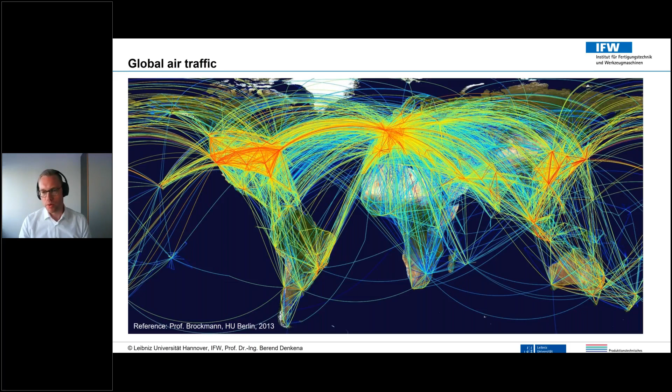But let me first start with a short introduction. I want to talk here about the global air traffic. This is a picture about the global air traffic in the year 2013. Beside these flights shown here, we have the topic of manufacturing of aircrafts. When we look at that topic, we have two things: first, the manufacturing, and secondly, the maintenance, which have to be economically and sustainable in the long term. So the topic is manufacturing and maintenance of aircraft components.

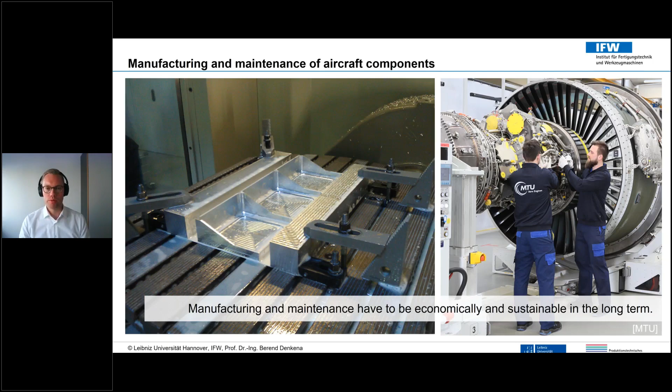So, manufacturing process chains in the aircraft industry. I have shown here 2 process chains which are important for our investigations at our institute. In the picture at the top, you can see the process chain of the production of cutting tools, typically out of cemented carbide.

We are starting here with the tool grinding process. You can see on the left side a reference workpiece with helical flutes in it. After the tool grinding process, we have a quality assurance. Then the tool is used in a milling process, for example, or also in a drilling process. You can see here this arrow, which is now going from using the tool from the top to the bottom into the second process chain.

And there we have the process chain of milling aircraft components, or also of repairing aircraft components. When we go ahead, you can see the quality assurance after that. And when the tool was used, we can also recycle this tool and bring it back into our manufacturing to use the tool. So this is the process chains on which we have a look today.

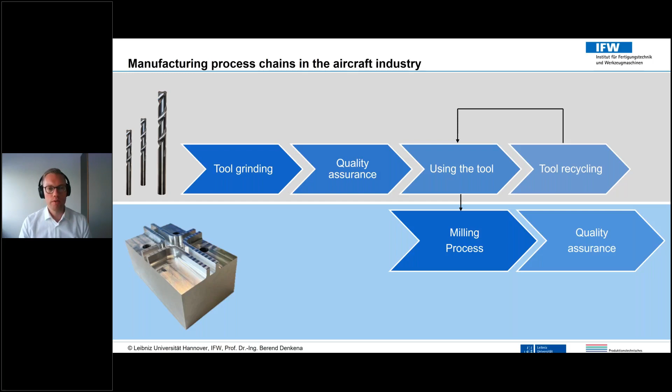And now I will come to my approach first, and I want to show you how AI models can be used in a self-learning process adaptation in these process chains.

So first, I want to start with a vision of an autonomous production system. In a typical production system, you have a lot of data: the value stream itself, the products, the components, cutting tools, the processes. Production systems contain a wide range of useful data, but the use of this data is not merged today or currently, and merging it would enable an intelligent production. So merging all this data is important to form an autonomous production system.

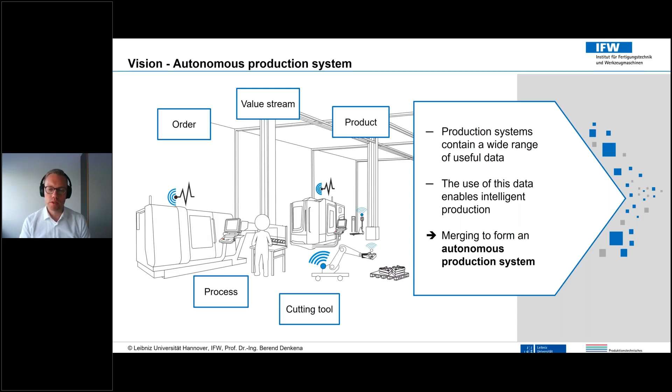How can we do that? The problem we are looking at here is that manufacturing data is not merged today. Knowledge remains at experienced staff, and assistance systems in process planning are rigid, they cannot adapt to other circumstances. The objective here is to combine different data types, to use simulation-based process adaptation, and to realize a knowledge transfer to save resources. So in the end, we have the approach of an AI-based self-learning process adaptation, in which we are also using digital twins.

Here I show you the approach in a picture. Typically our processes start with the CAM planning. After the design of a new product, we have the computer aided manufacturing, and after that NC code is generated to run our machine tools.

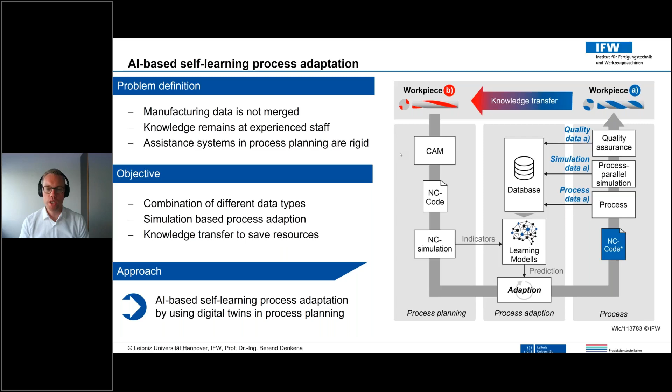We are using in our approach not directly the process. We are using first the NC simulation. This is a material removal simulation, which enables us to calculate the local cutting conditions between the milling tool and the workpiece, for example. Local cutting conditions are indicators for learning models, and by using these learning models, we can do predictions to adapt our initial process planning.

This adaptation is starting before the first real process to have a virtual adaptation and optimization of our processes. In the end, we're having optimized NC code, as you can see on this blue color. And then we are starting with the process. I've talked before a lot about different data which is not merged.

Here you can see 3 data streams which we now want to merge. The process itself is running, and thereby we can use, parallel to the process data, for example out of the machine control, spindle current or axis currents. Additionally, sensor data is also a thing which can be used here. And then we are using the axis data of our machine tool to run a process parallel simulation.

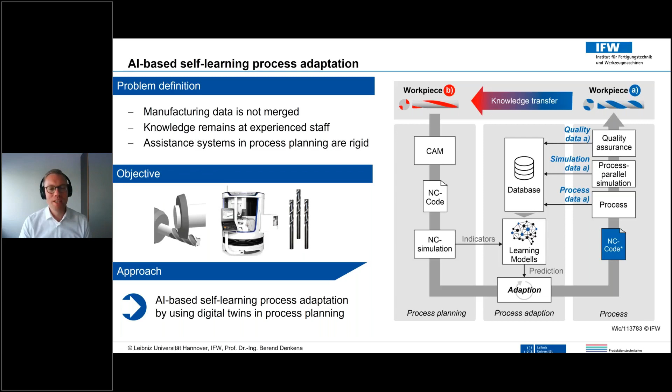Then I want to come to my 3 use cases in which I want to show you that approach, and in which I want to show you also digital twins or process parallel simulations which are used here. So let me first start with a digital twin in tool grinding.

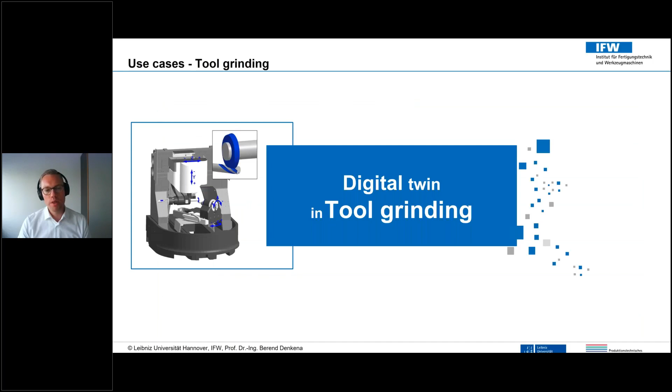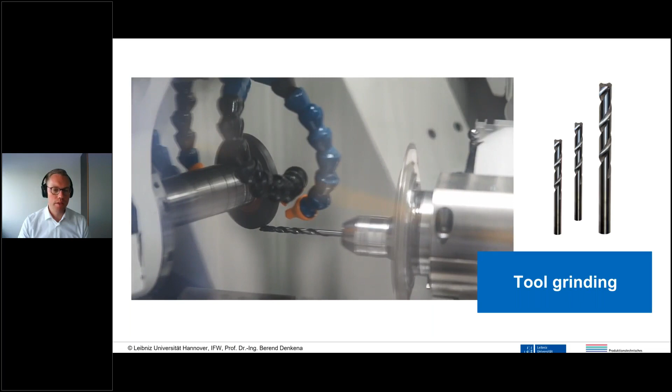Tool grinding is typically shown here. So here we have a helical flute grinded workpiece, but the process itself can be seen here very well. The grinding wheel is going through the workpiece, and typically we have additionally cooling fluid, and that's the process itself.

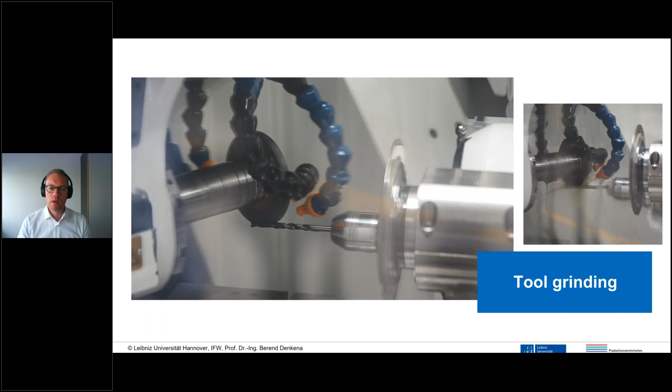When we have a look at our digital twin in tool grinding, you can see here on the left side the real manufacturing, the real machine tool, and the grinding wheel, and also the workpiece and the resulting workpiece, for example here after helical flute grinding. On the right side, you see the material removal simulation.

And these both worlds are now combined by using data streams. First, our axis positions to run a process parallel simulation. And also you can see here the 3 data streams: process data, quality data, and simulation data. All these data streams are going together in a knowledge database.

I think the idea here is to use these local cutting conditions, which you can see here. And the data can be saved by using the cutting conditions generally. So when we have a new tool, maybe similar cutting conditions are resulting also by grinding a new tool, and thereby a knowledge transfer is possible.

So in this video, you can see the process parallel simulation. The tool grinding machine is running. It can be seen better when we are coming to the second flute after the first, and the simulation runs by using the real axis data. So also when we change, for example, the feed rate directly at the machine tool, our simulation will show the same behavior as reality.

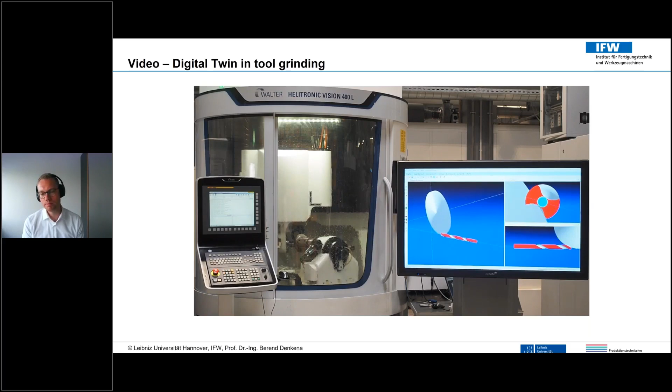My topic on this slide, it's a little bit full, so I will explain it step by step, is how can this data be used now in AI-based models, or how can AI-based models be used to adapt the process or to make the process better.

Please have a look first on the right side here on this picture. We are starting here with our typically NC code, and then we are having before a new process optimization algorithm. We are using automatically controlled Dexel material removal simulation, and our AI model here is a support vector machine model, a supervised based machine learning method. By using that, we are predicting our results, for example the quality of the workpiece.

And then we have an objective function to have a look at the result, is it good or is it bad, and criterion. When the criterion is fulfilled, we're going to our grinding process. If the criterion is not fulfilled, we are going over to our optimization algorithm. This optimization algorithm will then adapt our process parameters, for example the algorithm will adapt the feed rate or also the cutting speed.

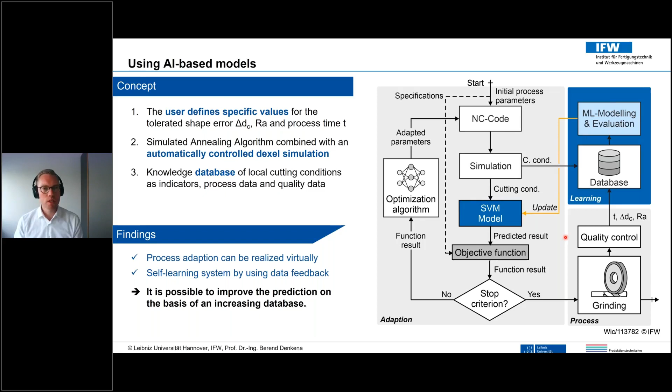Here a few results are shown. I think you can see a lot of them, so that's why I want to focus on two examples. First, please have a look at this red box now. Here we have a process parameter optimization regarding the workpiece quality.

You can see here first the quality regarding the roughness, the surface roughness. Then you can see the quality regarding the shape error, here the core diameter deviation. And then you can see the productivity by looking at the process time. We adapt here the process parameters, so you can see here in the end our feed rate and our cutting speed, which were adapted with the objective to make our quality better. The blue bar shows every time our initial values, and the gray bar our values after optimization.

You can see here very well that we are reducing our shape error by 47%. We are reducing our shape error by 47%, our surface roughness by 31%, but we are increasing our process time by 112%.

The second example is shown here. In this blue box, we adapt our process regarding productivity. As you can see, process time is going down, so we're having a faster process, but our shape error is going up.

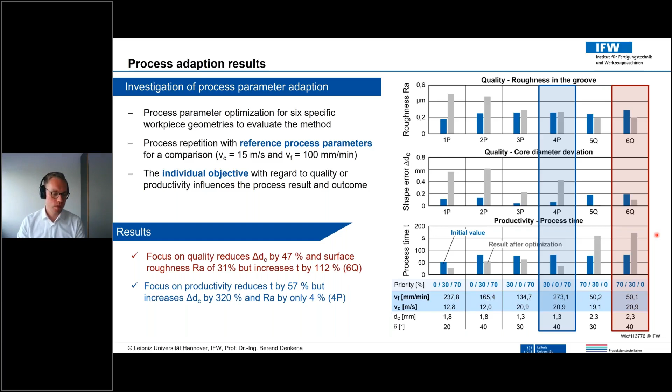Regarding my presentation time, I now want to come to the next use case first to show you more examples. Here we are looking at the repair process of fan blades, the recontouring of fan blades.

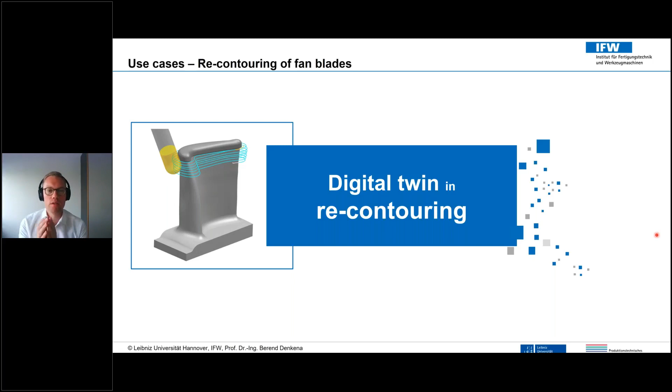After a grinding tool is used, we are having a look here at using the tool in our repairing process. Here you can see a turbine maintenance repair, and the typical process is that we have a fan blade and we are having maybe a patch on it, or also a weld seam on it, to add material after or during the maintenance repair.

In the end, this added material must be milled again to generate the targeted fan blade. So here we have an individual CAM planning, and you can see here, by looking at this extrapolated area, the new area which must be added and generated again in this maintenance process. Here you can also see the ball end mill, which is going around the blade using the tool.

So our approach here is to research and develop a software which uses CAM methods for virtual process planning.

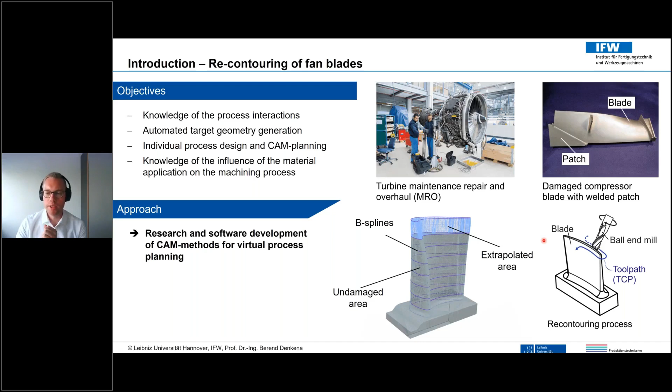It's really difficult because every fan blade has a geometry and shape error which is very specific. So every fan blade repair must be planned individually. So also in this case, we are using a digital twin for generating relevant data.

For example, here you can see the welding process to add new material to our product which will be repaired. Here the axis positions are used to run our process parallel simulation, which can be seen on our right side. So in the end, we are realizing thereby also a digital twin.

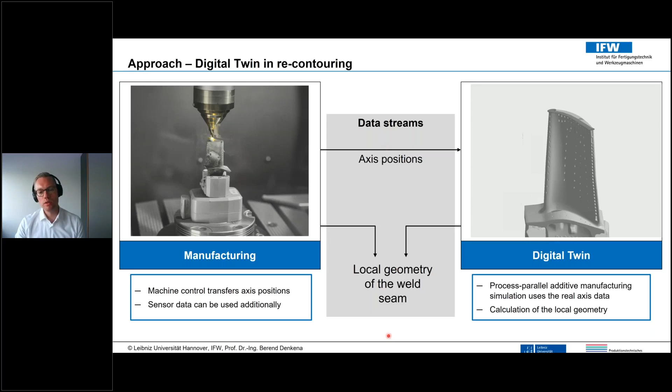And the important thing is that we want to generate thereby the local geometry of our weld seam, which can be used in process planning.

Also here we have models. For example, there's the question, how high or how wide is our weld seam in this simulation? The axis positions can be used directly from the machine, but the question is, how is the weld seam looking in the end?

And here's additionally a second use case, for example, for AI-based models in the future. We are using also a data feedback to generate these models, and they are using the current and the feed rate to predict our weld seam height and width. Also in this case, it's really important to have such prediction models.

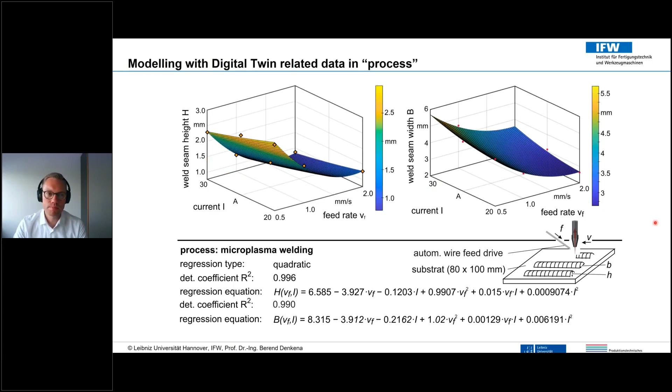Here, our digital twin from the welding process is again really important because we can use this digital twin to simulate the planned tool path with the real welded workpiece, and thereby we can also calculate our local cutting conditions in the simulation.

And thereby it's possible to calculate in which case we have more material or less material, and in which case our tool path planning here must be adapted. So a very specific, difficult process planning here, but it can be optimized by using these intelligent planning methods and also by using our digital twin to have a better look at that.

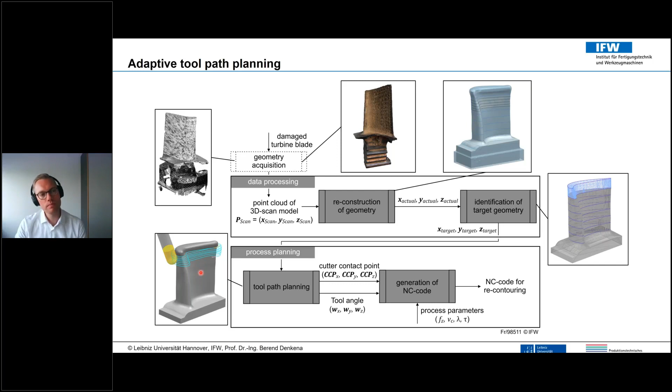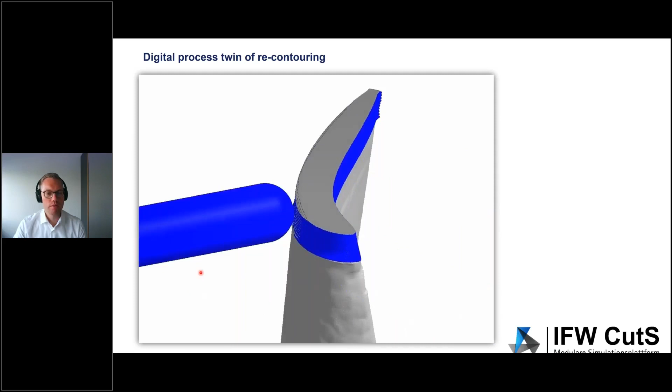And here you can see again a video of our simulation of the recontouring process. And you can imagine when we are using in these simulations our digital twin of the welding process, it can be better simulated in which cases we have more material removal, in which cases less, for example.

And in the end, you can see here the real recontouring process, in which it is very important to have an optimized toolpath planning.

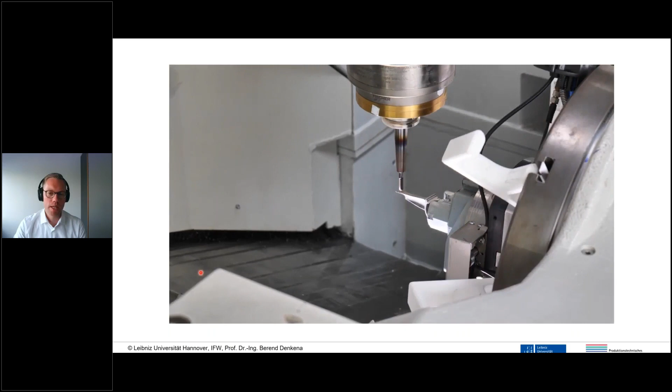So now I will come to my last use case. In this use case, I want to show you digital twin in quality assurance. So after generating or grinding a cutting tool, after using this cutting tool in repair processes, here we have a look at our quality assurance, maybe after repairing a component, or also in the case of new manufacturing of a component.

A one-time execution of this work planning is extremely time-consuming and cost-intensive, and that's why we want to have a look at a better, intelligent inspection planning.

The challenges here are that a low availability of production data is currently there. So we want to synchronize significant machine, sensor, and simulation data to realize a virtual quality inspection. Feedback knowledge from quality inspection to inspection planning is important here, for targeted planning of quality inspections to avoid unnecessary inspection efforts.

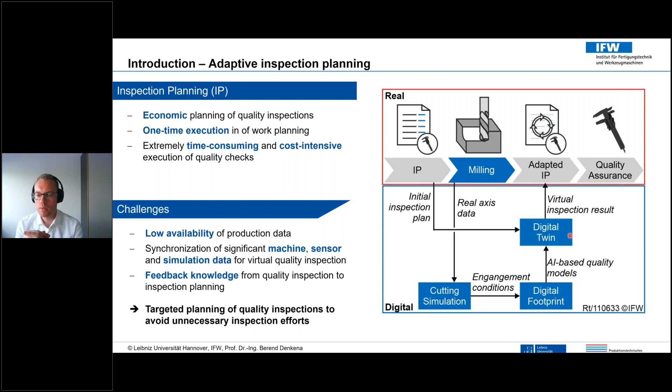And this is important here to adapt our inspection planning. So please imagine when our digital twin can show us by these predictions on which positions it's more important to have a focused or a lot more inspection, then that would save resources, because other aspects don't have to be focused on so much. In the end, we have an adapted inspection planning and better quality assurance.

So that's our approach.

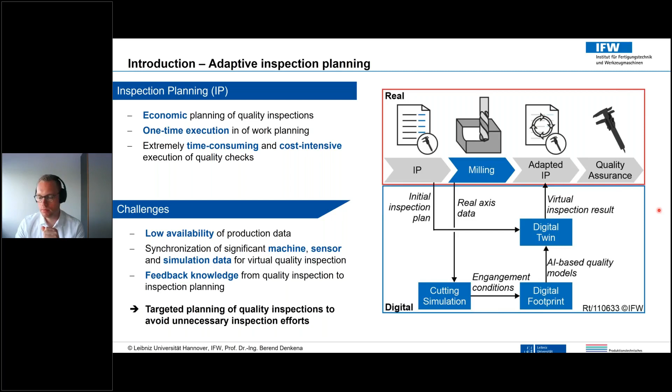Also here we have a similar picture like in the two cases before. So our digital twin for virtual quality inspection on the left side, the real manufacturing on the left side, the material removal simulation or the digital twin. And again here, like in the first use case, the axis positions are used, process data is used, quality data and simulation data, and all this data is merged here in a quality database.

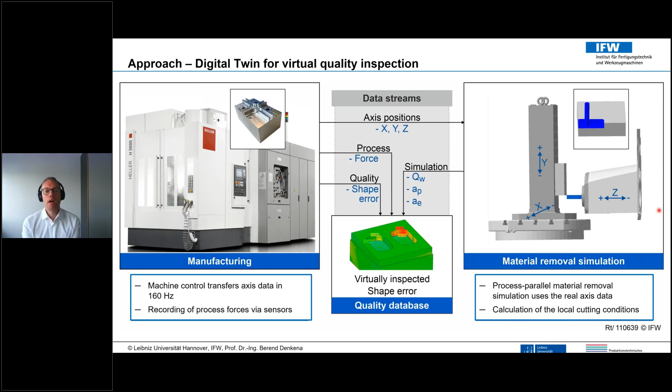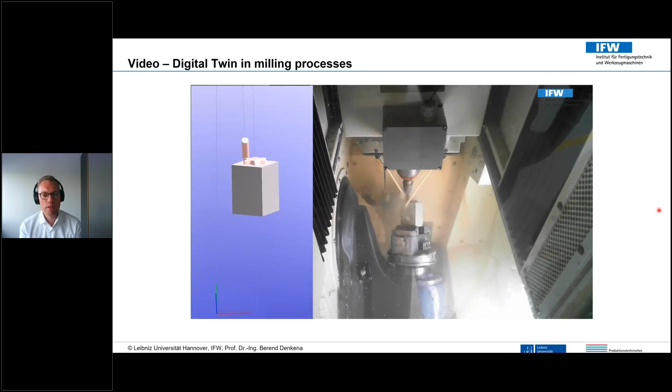First I will show you a video of this digital twin again, so that you can imagine how this will be looking. So here we have a reference process with a star geometry, but it can be seen very well also for a 5-axis process in this case, how such a process-parallel simulation can be run and how the simulation will generate important data for the local cutting conditions.

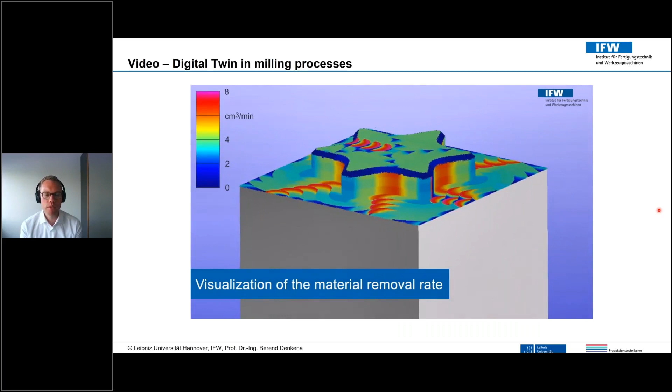So that can be seen here now. So here this local cutting conditions are visualized. For example, here's the material removal rate. And here also the local depth of cut and so on.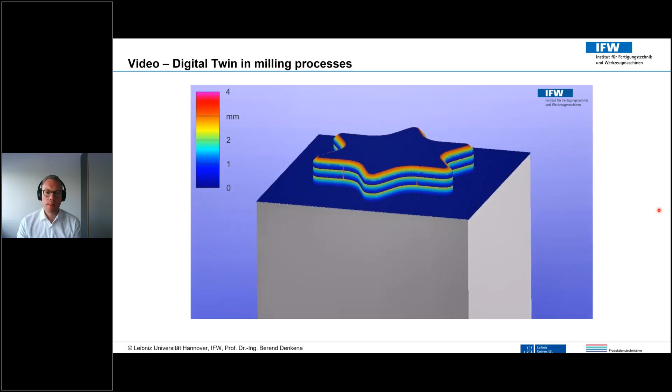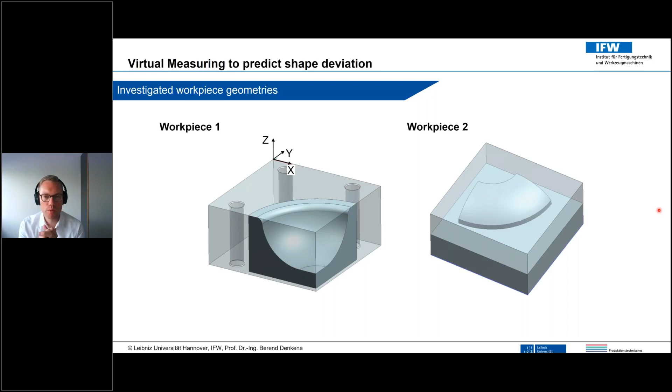But as I said before, how can this data be used to generate AI-based models and to make the process predictions also better? Here we have investigated two workpiece geometries, so on the left side workpiece 1, on the right side workpiece 2. And here you can see a result for having AI-based models.

So we're using here again a support vector machine with a training data set of 70 workpieces. We are modeling the shape error in ball end milling based on simulated local cutting conditions. The important thing here is that we are using, in both prediction cases, for workpiece geometry 1 and for workpiece geometry 2, just the data of geometry 1.

So that can be seen here: trained with the data set from workpiece geometry 1. And also we predict by using this model the shape error in the aspect of workpiece 2. And in both cases it's possible to predict the deviation. It can be seen here, so here we have the measured deviations and the simulated deviations.

The perfect case will be when each point will be on this line directly. But you can see in both cases it can be predicted very well how our shape deviation is. So thereby we can show that a sufficient model quality can be achieved for a kinematically more demanding use case, with small training data sets, and it's possible to transfer knowledge to other workpiece geometries. That can be demonstrated thereby.

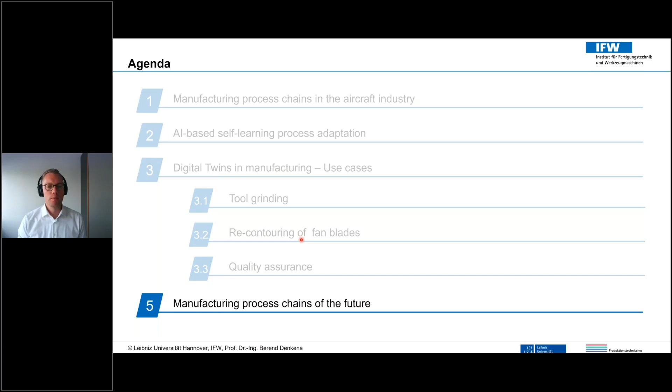In the summary, I will show you the manufacturing process chains of the future. So again we have the manufacturing process chains from my first slide, but now we are adding digital twins to that. So in tool grinding, for example, you have our digital process twin; the quality assurance after the tool grinding generates a digital workpiece twin. And also here, by using the tool, we have a workpiece twin. The recycling process itself can also be realized by using a digital process twin.

Below we have our milling process, which was shown before. And now you can see that in the future we want to transfer the workpiece twin after the tool grinding to our digital process twin of the milling process here. And in the end we have our quality assurance, where we are also using the workpiece twin. So a lot of twins are coming into our production system, but this is really important to generate more data, to save data, and in the end to use AI-based models.

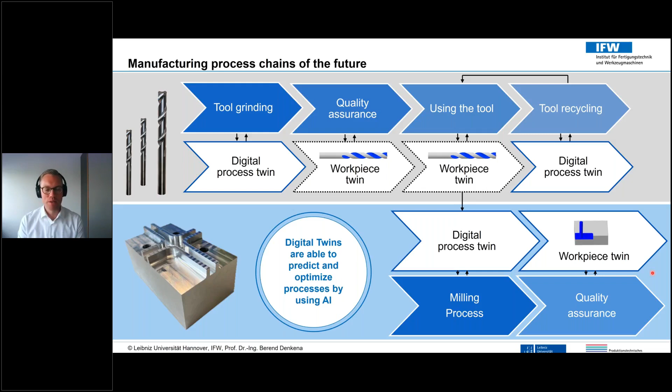What is really important here is to show that our twins will be influenced by reality and also influence reality itself in a feedback loop. So that is an important aspect when we look at twins. In our case, the processes were adapted by our predictions, and thereby the twins and the predictions will also influence the real world. So that's my last point: digital twins are able to predict and optimize processes by using artificial intelligence. Thank you for your attention, and feel free to ask questions.

First question is looking into the grinding process, which is a complex process as such. Are all three topics working together in real time? And if you look into other processes, are there time constraints depending on the complexity of the process, the tool, the simulation, which give you problems to install such an AI-driven optimization?

Yeah, so maybe we have to separate that. It's not really important to have these AI-based predictions parallel to the process. For us, it's more important to save all this data parallel to the process. In our approach, we want to make future processes better, so adapt the planning of, for example, the next batch size which will be manufactured. Thereby, we don't have this time problem for the adaptations of the next process.

But the simulations can also be run for faster processes in parallel, by having a not so detailed resolution. In the end, that will also make our quality worse. But when we look at our approach, where we want to make the planning for the next batch size better, then it's not a big problem with the time.

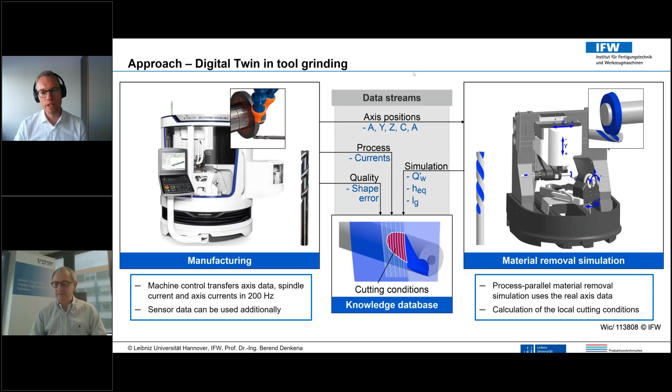Interesting question. It's depending on the various processes, but in manufacturing we have in a lot of cases, when we are looking at specific work pieces in small batch sizes, the problem that we don't have so many data sets. And AI methods typically must have a lot of data to be good. For example, in image processing using neural networks, a lot of data sets are used, 10,000 or 100,000, for example. The question is, how can we use AI also in cases with not so many data sets?

In our investigations we have seen that, for example, methods like the support vector machine can be used better for smaller data sets. We have also other investigations in which we are using neural networks, but in these cases a lot more data have to be there. That's why in this case we are using a support vector machine.

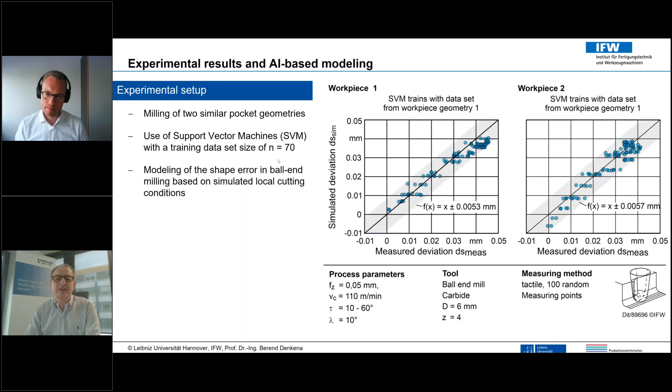This question came up with your second use case, where for these repair processes, it's more or less a one-piece process. So can you learn such a model out of more or less similar other repair processes in this area, so that over time you can optimize it?

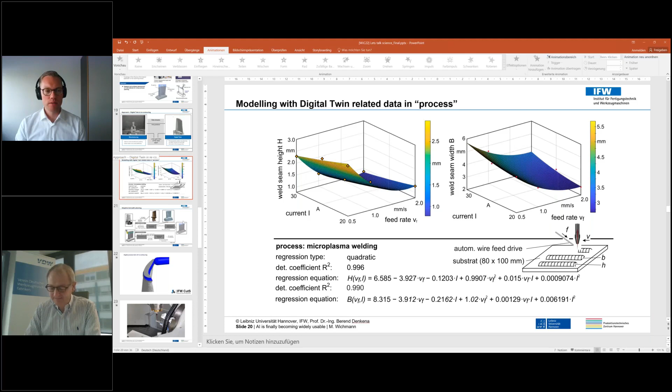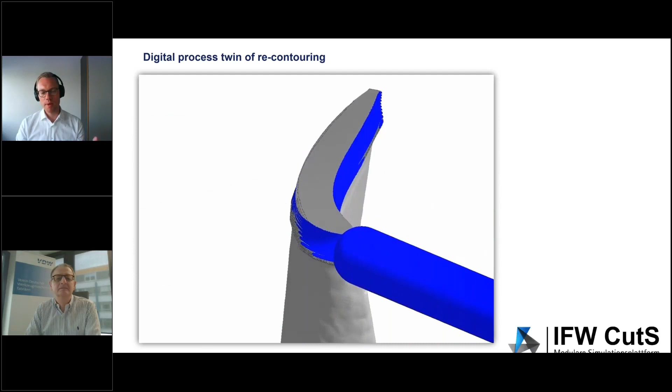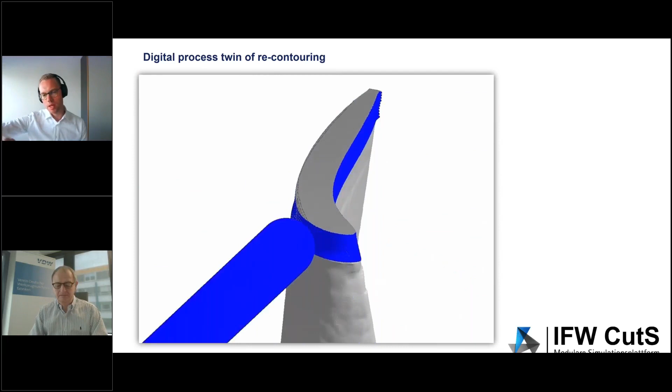Yeah, I think what really is important is the idea of our local cutting conditions. For example, when we have in this simulation predictions for the shape error or predictions for the material removal itself, then it's important that we don't have just one value at a time step, but a lot of values. When you imagine that our cutting tool can be discretized, like the grinding tool which I've shown before, it's possible to calculate a prediction for each single cutting condition. Maybe in the next fan blade case, the next repairing case, the geometry itself is different, but we can find similar cutting conditions in it, and thereby it's possible to transfer it.